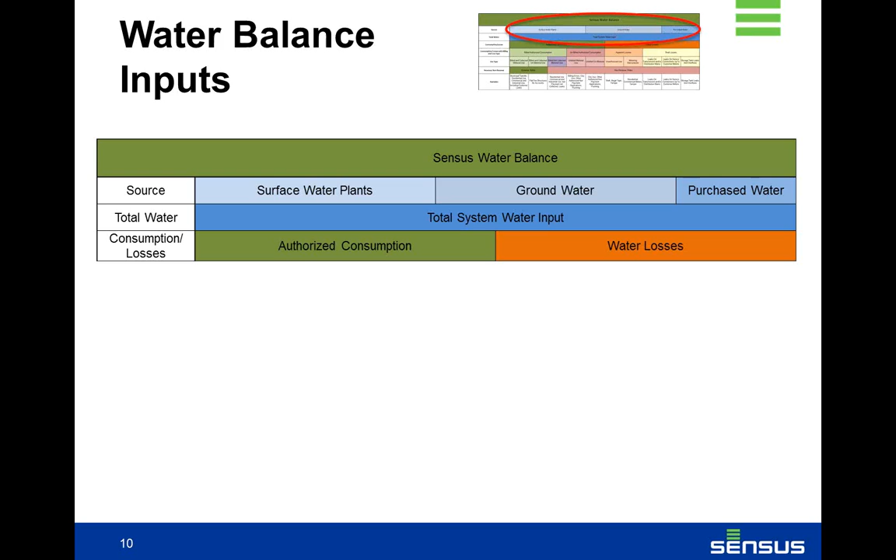The first being the water balance inputs. So we obtain water from surface water plants, groundwater, or even purchased water from other neighboring utilities. Those 3 components comprise the total system water input. From there, the water is either consumed in an authorized manner or considered a loss. And we'll further break down those pieces going forward.

Looking into the authorized consumption component of it, typically those pieces are two use types: billed and collected metered use, billed and collected unmetered use. So the first, as the most common usage, would be either we transferred it to another municipality and sold it there.

It was used in some sort of residential, commercial, or industrial consumption. But importantly, any leaks associated with after the meter would be accounted for here as revenue water. We could also have billed and collected unmetered use where there's flat fee structures, making it difficult to totally account for the entire flow associated with that portion of revenue water.

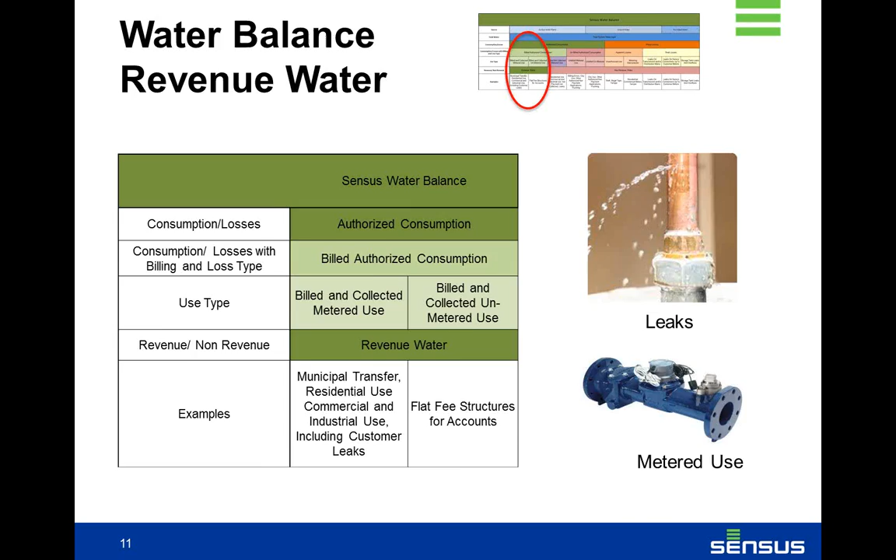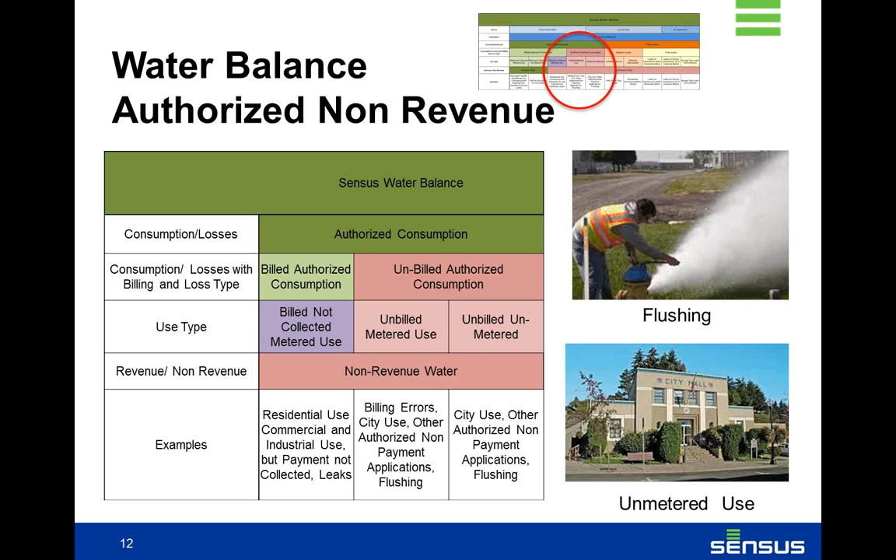Then there is also unbilled authorized consumption, breaking down into both unbilled metered use, an example being a billing error, city use, or other authorized non-payments, which could be flushing within a utility. And then unbilled and unmetered use - again city usage might be unmetered, flushing might be unmetered as well.

So all of those components comprise the unbilled authorized consumption portion of the water balance. Moving forward to the loss piece, we break down the losses into several different groups. Unauthorized use, such as thefts, illegal taps, or tampering with the meters, comprise a portion of non-revenue water.

Second of apparent losses is metering inaccuracies, where we're not actually accounting for all of the water that is consumed and used for commercial, industrial, residential use. That could also be attributed to some sort of tampering associated with the meter or age of the meter - an opportunity for us to account for that water going forward.

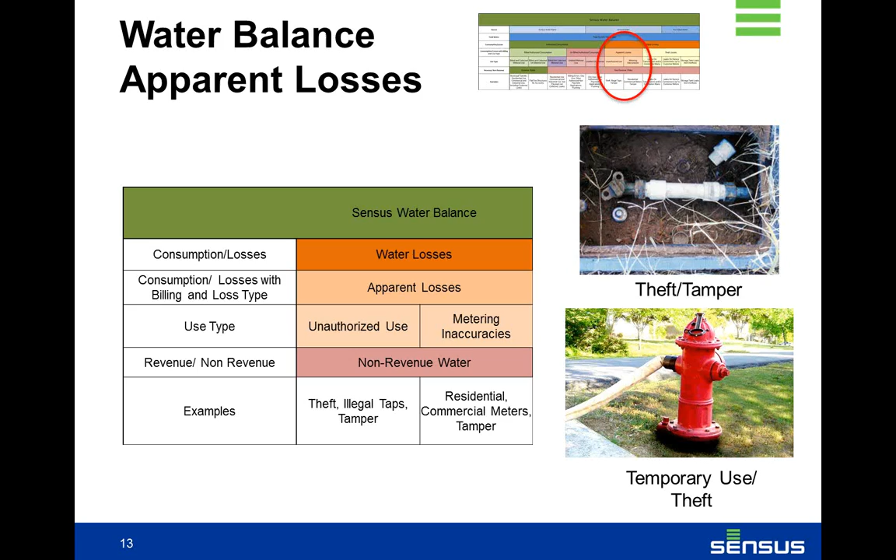And the last part of the water balance are the real losses. We look at those in terms of three distinct use types: leaks on transmission and distribution lines, leaks on service connections up to the customer meters, and then storage tank leaks and overflows. Those all comprise non-revenue water as well.

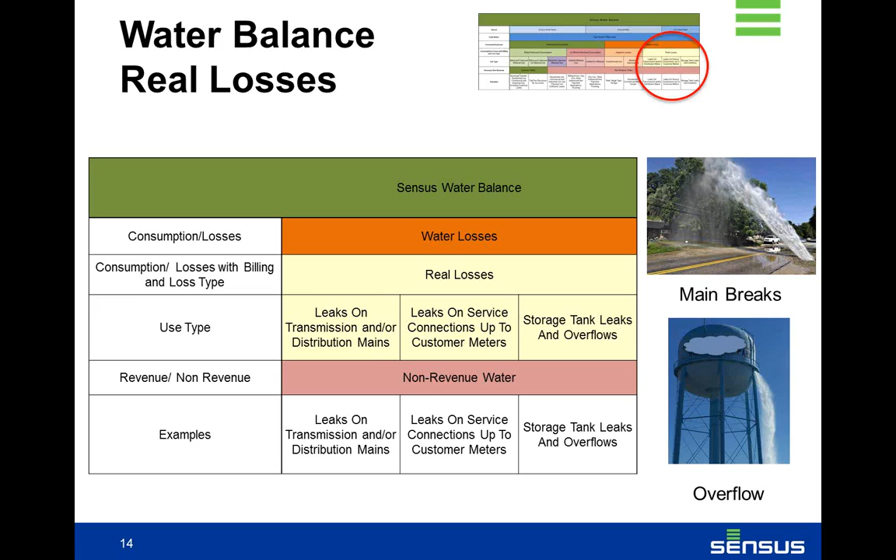Bringing that together gives us a complete picture of all of the water coming into the distribution system, less all of the water that was consumed, transferred, billed, used, or unaccounted for in some other methodology, to bring together the total water balance of each individual utility.

So if we look at how to monitor non-revenue water, many of you use different methodologies today. The most common one is to monitor produced versus sold, where we know all of the water put into the system and ideally all of the water that's sold, leaving us some portion of non-revenue water, but this doesn't really break it down into the same granular categories.

So can you break that down further into apparent losses versus real losses, trying to attribute to things such as theft, tamper, or meter inaccuracies? Thirdly, importantly, is how accurate is the information? Is the information conveyed to us reliable and dependable? Are there meter inaccuracies - things we need to account for or adjust to close that water balance appropriately.

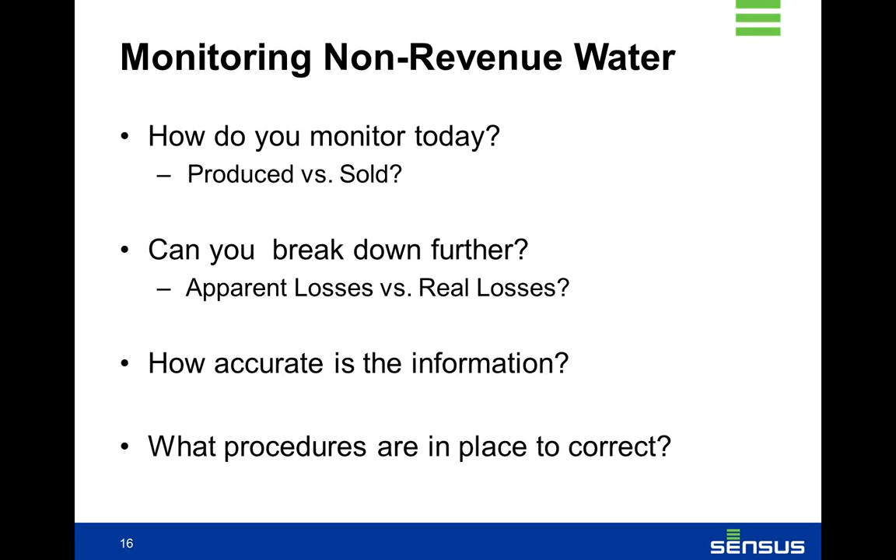And then lastly, what procedures are in place to correct or adjust all of the areas where we attribute either revenue or non-revenue water? If we go forward and continue to look at these things, we look at two specific cycles associated with non-revenue water.

Starting with item number one: as non-revenue water increases, the costs of operation increase. These costs further rise and increase capital expense to meet the demand of additional supply within a distribution system. That goes to item four, where budgets are decreased, restricting corrective actions to reduce non-revenue water. This forms a vicious cycle, further constraining our ability to recover from all of the non-revenue water activities within a utility.

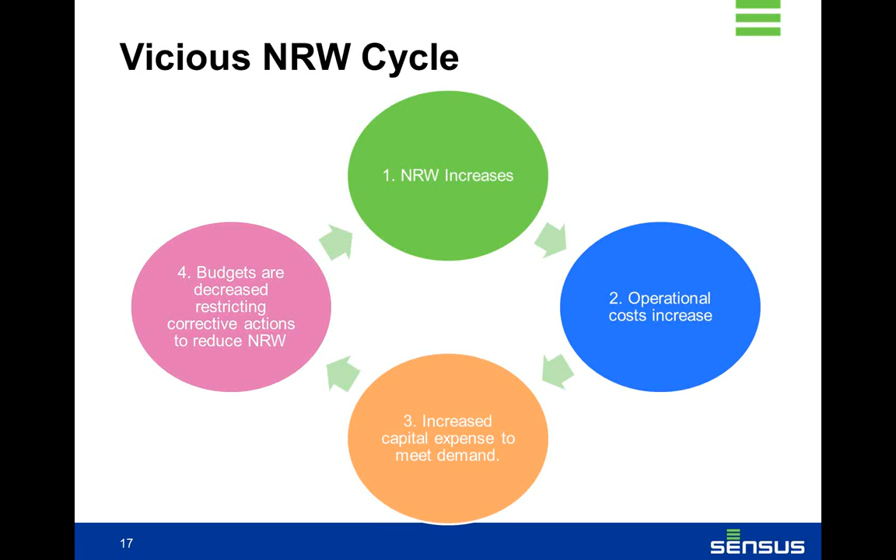The opportunity for us to change from a vicious cycle into a virtuous cycle starts with non-revenue water decreasing, which then increases our revenues and decreases operational costs, providing deferment of capital spending for supply increases. That creates funding available to invest in additional non-revenue water recovery. As we break that vicious cycle, we capture additional funds to improve the utility's operation and find new methodologies and funding available to find more of the non-revenue portion.

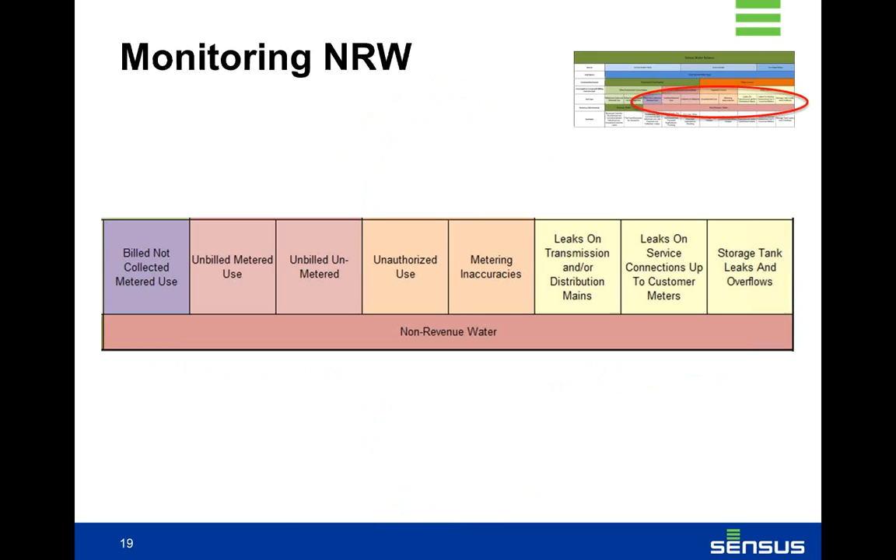So as we begin to look at monitoring all of the non-revenue water, I want to focus a little bit on different types as we look at each specific category.

The first is billed not collected metered use, something faced in all utilities where we have to write off the amount of money we spend to produce water, send it to a consumer, send the bill, and then not collect the payment. For some utilities this can be a significant factor, anywhere from 5 to 10% of actual utility payments, and frequently numbering over $100,000 a year.

Often the utilities would have to bear the cost of expensive truck rolls and then the labor associated with those truck rolls. Could we use that labor to find higher value leaks or repair the leaks, thus helping us break that vicious cycle of non-revenue water?

As further technology becomes apparent and available to all utilities, remote shutoff valves alleviate and provide an opportunity for utilities to capture and mitigate non-collected payments faster, saving more time and money for those utilities.

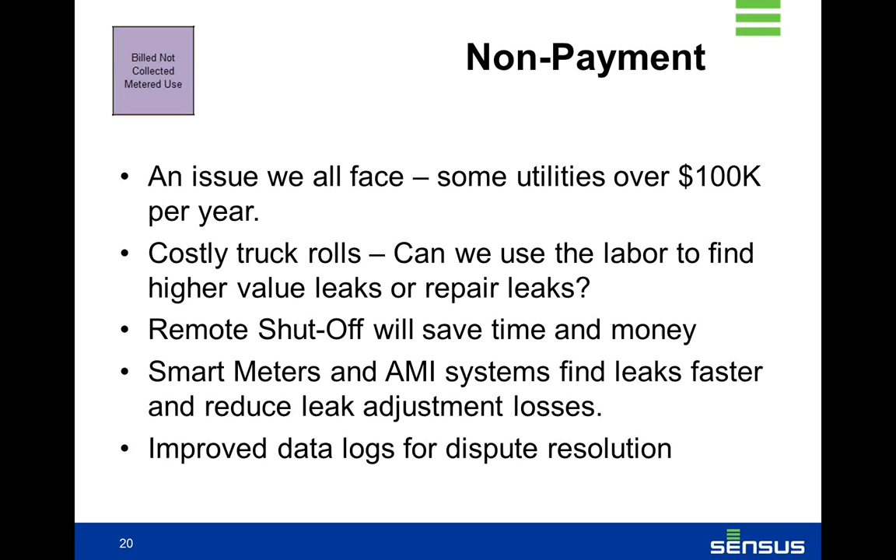Smart meters and AMI systems that report on an hourly basis can certainly find leaks and reduce leak adjustments going forward, which often contribute to a high volume of non-collected or write-offs associated with billing activities. With the new smart meters, most include improved data logs for dispute resolution, further enhancing collections and disputes associated with leaks or non-payment activities.

If we look at authorized non-revenue water, where it's unbilled metered use or unbilled and unmetered, things like city buildings, flushing, city parks, the easiest thing to do is capture that consumption using meters so it is accounted for in the balance, even if it is not billed. That way it helps us understand exactly where all that consumption is, and could also help us find additional usage or conservation methods associated with those portions of consumption.

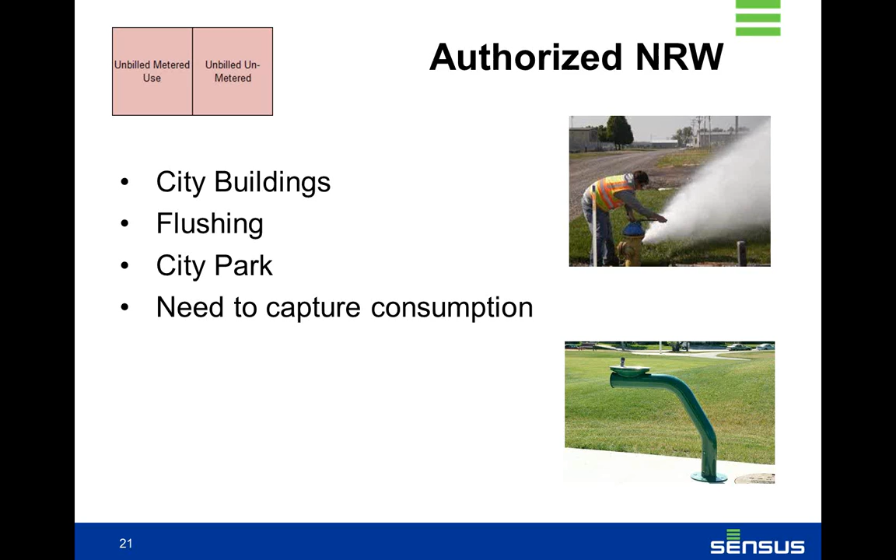Moving on to theft, an unpopular topic for all utilities, but certainly something that occurs in many municipalities. Smart meters and smart devices can detect tamper, empty pipes, or reverse flows associated with theft activities. An AMI system will help all utilities monitor those activities faster, getting hourly or daily reads associated with any of the activities within the service connections.

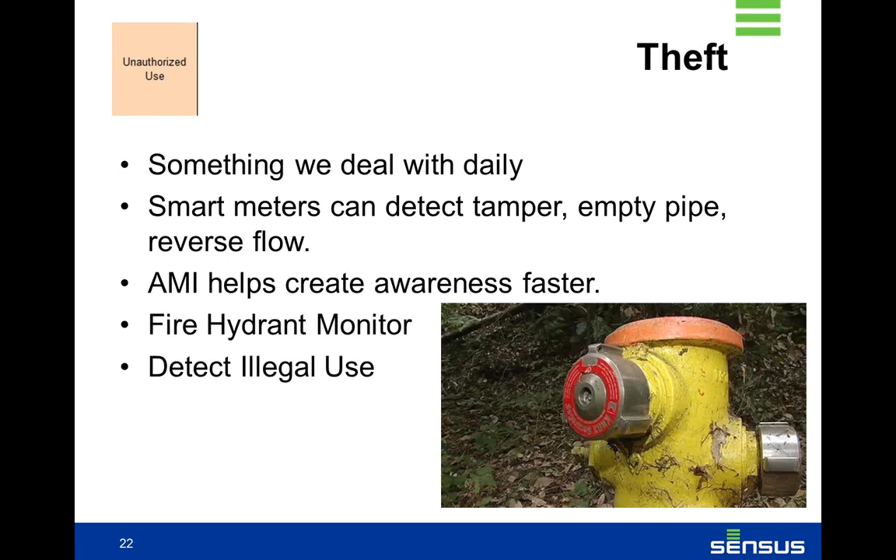Additionally, many AMI providers are coming out with fire hydrant monitors to monitor consumption and use inside those units. If there was any unauthorized distribution from there, it could be detected quickly. In an AMI system, you would get that notification possibly in time to take action and correct the activity.

In terms of meter inaccuracies, this is one of the easiest ways for a utility to capture a large portion of non-revenue. As mechanical meters get older, there is frequently a drift in accuracy that can be a substantial loss. Some of those meters have 10% or greater inaccuracy due to wear and age. The opportunity for utilities to invest in both solid state and long-lasting meters to provide extensive accuracy with the flow usually has a very attractive return on investment.

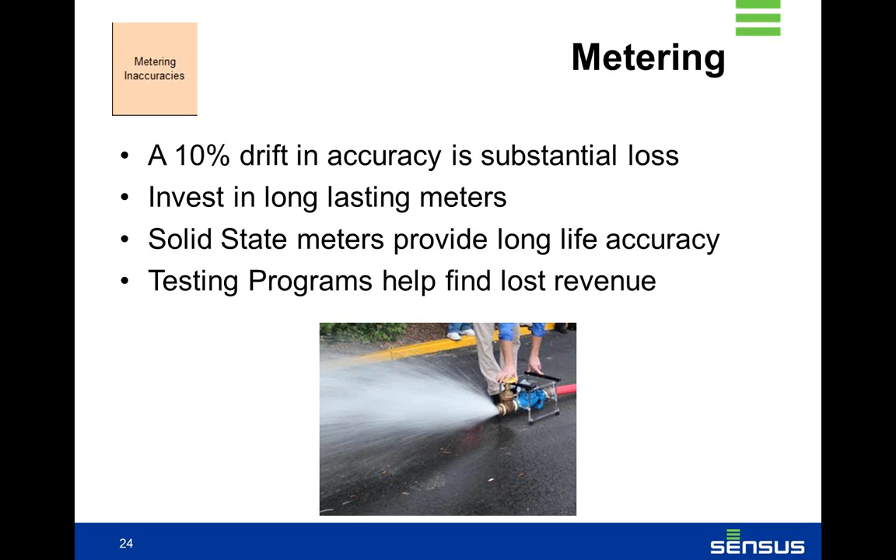We do encourage anyone to start testing programs, particularly around the large meters, as they tend to represent a significant portion of distribution consumption, and they're easy to test. They typically require field testing versus replacement, unlike residential meters, which is simply distribution of more units to the field. But a testing program can find a significant amount of actual flow that was consumption, raising your revenue and reducing the non-revenue water component associated with the water balance.

If we look at real losses, the leaks, obviously something we want to improve and avoid in all utilities. Typically, the easiest way to find leaks is to attribute more data throughout your entire distribution system, whether that's smart meters, pressure monitors, or additional devices that pick up sensors on tanks and overflow consumption within the distribution system. Additionally, acoustical monitoring can be deployed on many AMI systems to detect where the leak might be.

This gives you the opportunity to look at all four stages of the leak: awareness - do I have the leak and how big is it; locating the leak with the use of pressure or smart meters or acoustical monitoring; then deciding to take action; and most importantly, verifying the leak quotient has been changed and we have a true improvement in the system and reduction of those real losses.

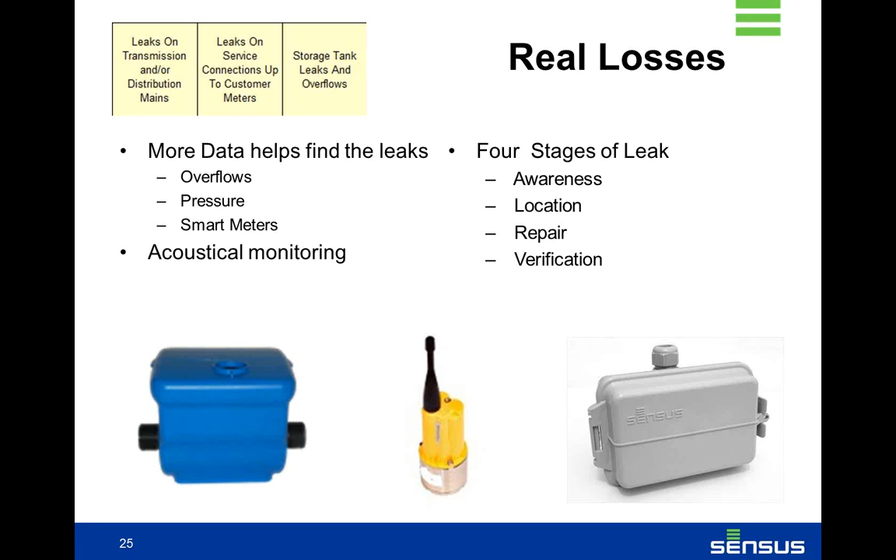This can be used for many types of leaks, whether they're in the distribution mains or in the service connections, or whether they're just tank overflow leaks as well.

On top of many of these things, you can use analytics to track the data, and we encourage you to utilize that on an hourly basis, because the diurnal use pattern within a utility system does vary by time of day. Monitoring things such as pressure and acoustical levels over that entire use pattern gives you a lot more intelligence to find the leaks.

You see there examples of leaks detected through an AMI system, either meter or actual acoustic monitoring. I think Avery will share more about that, based on his experience, going forward in the rest of the presentation.

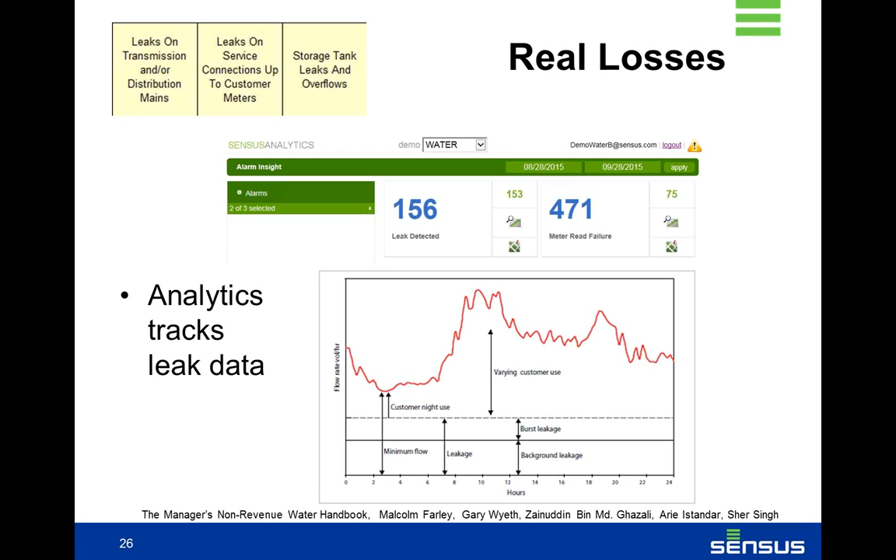Additionally, in looking at the real losses, you can attribute specific hourly consumption data, whether that is patterned use or continual leak data associated with real losses, to understand if it's consumption or leaks associated with distribution of the water.

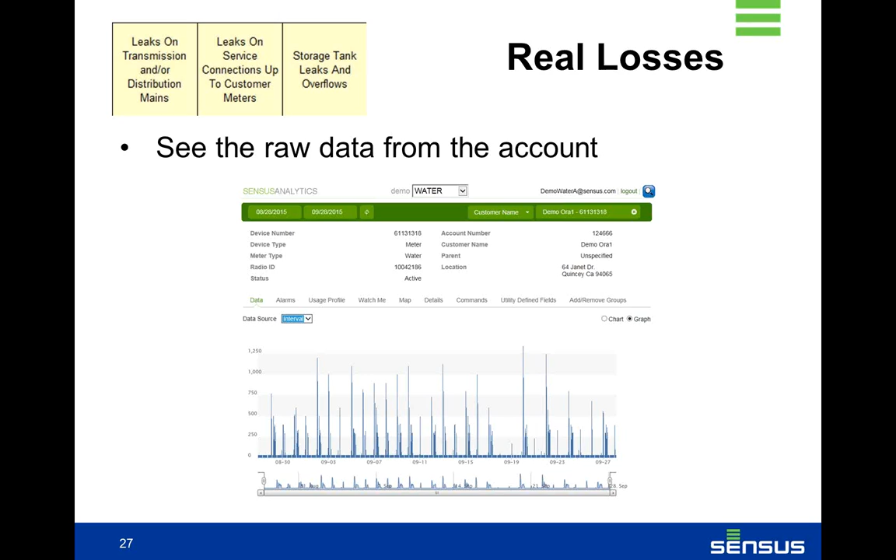Another way to help find and identify real losses is to deploy a district metering area program, where you break down your service area into smaller, easily tracked zones, so you can focus on older parts or areas that you suspect or know have a higher leakage rate within your distribution system.

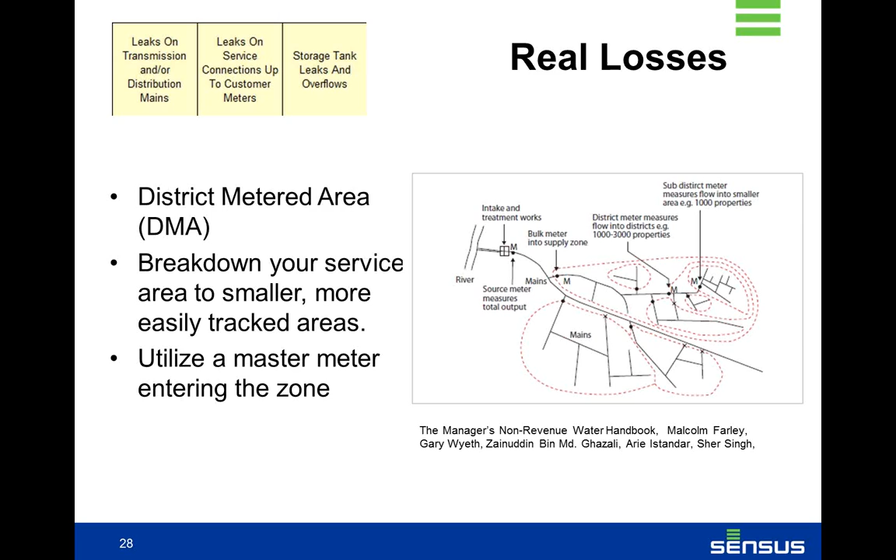Utilizing a master meter or virtual meter inside of those zones to account for the water may allow you to progressively find the leaks and then stage that out over time to grow, instead of trying to take down the entire process in one calendar year. So the use of district meters does help us find and break down that system.

Additionally, the use of pressure associated with the entire distribution system, where you could look at a pressure profile of what the actions are with respect to flow as that pressure changes, as flow consumed or the amount of water consumption rises or lowers, would be a great way to identify a leak within the distribution system.

If the flow is actually reduced and the pressure does not increase, typically that is an indicator of a leak, and you can use this to both identify the leaks and reduce and control the pressure within the system, as pressure is significantly one of the components of a distribution system that helps cause leaks, and is the easiest way to reduce the leaks if we're able to reduce the pressure within the system to minimize leaks in the lower usage times of a water distribution system.

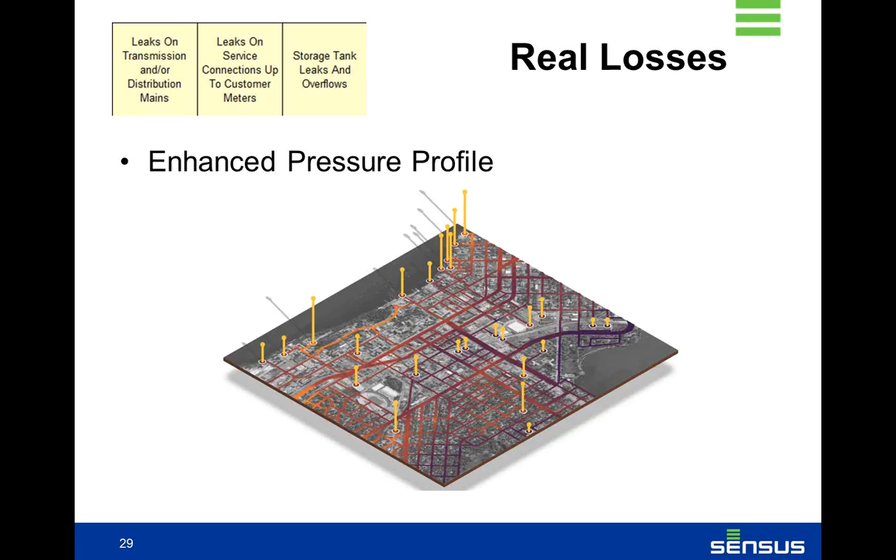You'll see that here on the next chart. By simply reducing the pressure, you can reduce the amount of leakage through a known hole in a significant pattern going forward. So there's some opportunities within a distribution system, just by reducing the pressure, to reduce the amount of loss within that distribution system.

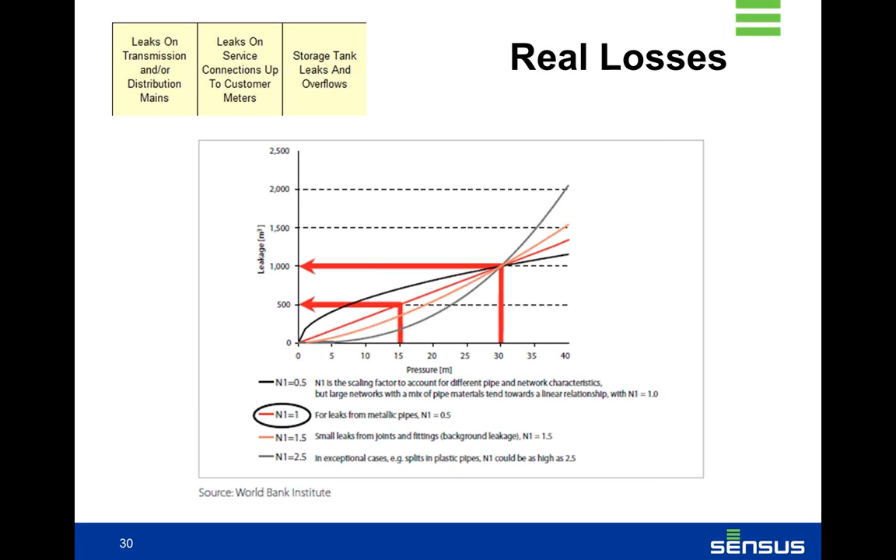So if we try to summarize all of those things, the easiest three ways to capture more revenue - and you can grow into this over time, but as you start to break that vicious cycle and enter into a virtuous cycle - by doing three simple steps such as ensuring your meter accuracy, creating some sort of testing program to make sure that you're accounting for all of the consumption that is delivered, is an easy way to identify and capture the most amount of your water balance that is already available and is not necessarily a real loss.

But to help find more of the real losses, capturing more data to account for all of the areas of the water balance, breaking down each of the components we shared today, helps identify which pieces are being used and which are being accounted for. And that does go consistently with both measuring pressure and consumption and acoustical monitoring within the system.

So the more intelligence you can put into your distribution system and capture more data, the more likely you are to raise your awareness, your accuracy, and your location associated with those leaks. In order to do that, typically you need to analyze frequently the data available to you.

So the best way to identify a leak is to baseline the data, review over an hourly basis the consumption pattern associated with your utility, and utilize programs available such as the AWWA free water audit software, which is available to all water utilities to help close that balance. The same information we provided today is analogous to that software that is available for everyone's use going forward.

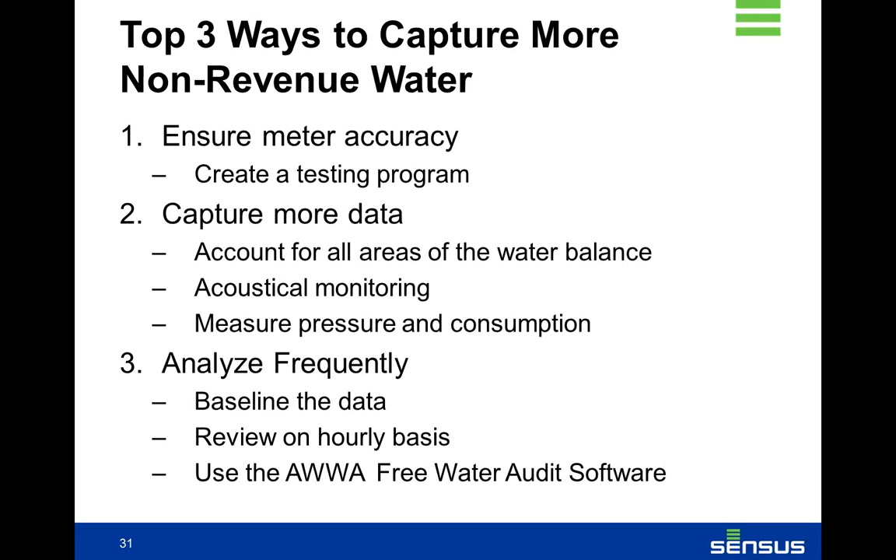So if we look at that, we encourage each of you to follow through your own water balance, the Sensus water balance, or the AWWA water balance, to identify each of the components within your utility, whether they are authorized consumption or non-revenue water pieces, to begin to count that and start the virtuous cycle of improvement within your distribution system.

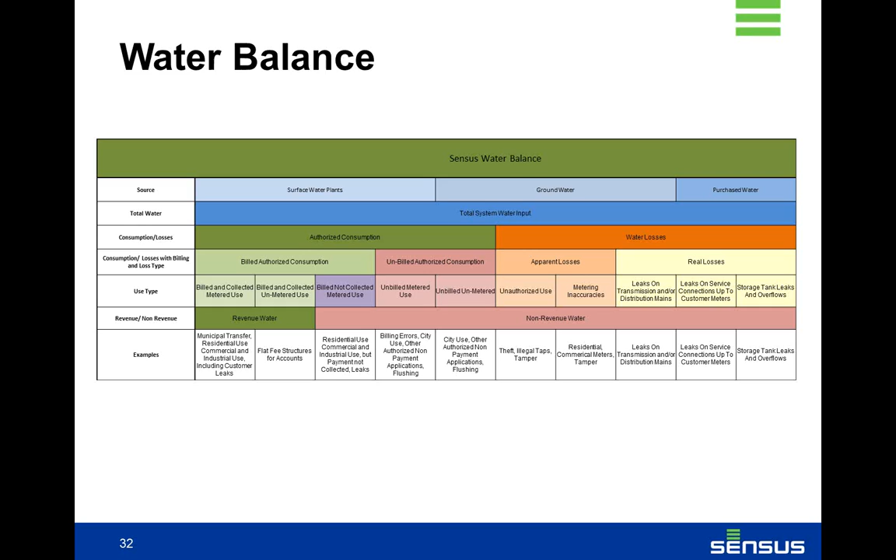And I want to leave everyone here with a reminder of why we're all here, and that's to leave clean water available for the future, whether that's energy consumption or distribution for fire safety or clean water for public safety and health for all of the citizens to come - that is our primary purpose. With that, that's all I had today.

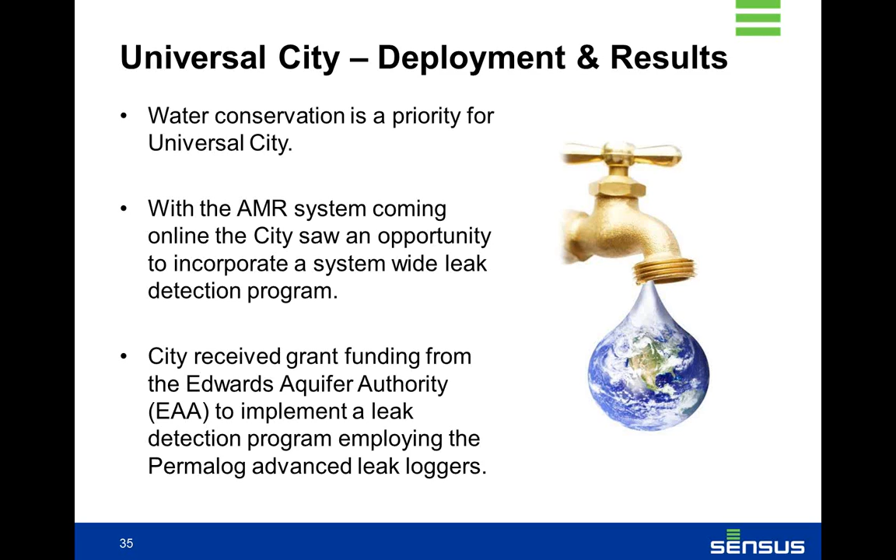With the Sensus FlexNet Advanced Metering Infrastructure, or AMI system, becoming operational, the city realized an opportunity to implement a leak detection program that could cover the entire distribution system using leak noise or acoustic noise loggers. It was hoped that with this technology, it would be possible to audit the water system on a daily basis and address leaks before they would normally manifest otherwise. With the AMI system already in place, the water utilities would have to come up with the funds to purchase the loggers and transmitters. So the city approached the Edwards Aquifer Authority in the hopes of obtaining funding for this project.

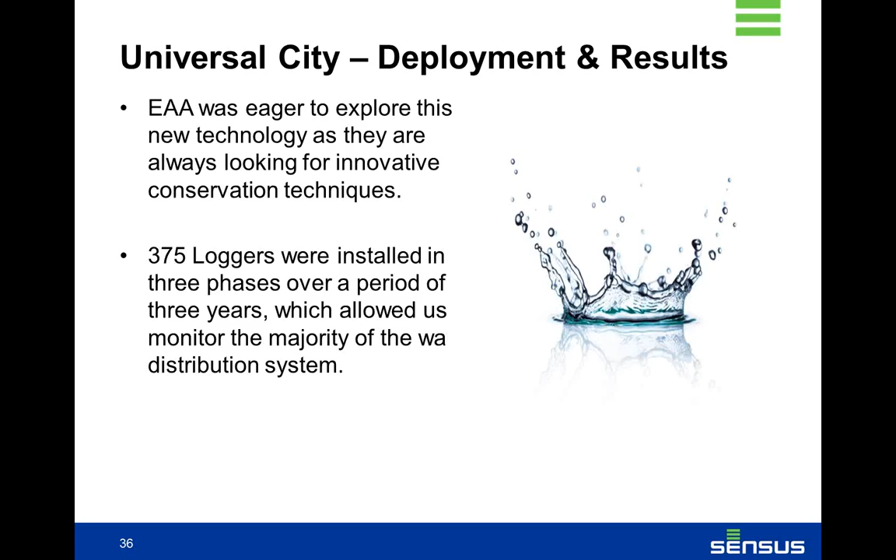The completion of the project made Universal City the first complete monitoring system, basically monitoring our distribution system to meter end user in the Edwards Aquifer region. At the same time we were installing the loggers, the city also replaced all water meters in the distribution system. At that time, the total was 5,784 meters, ranging in size from 5/8 inch to 10 inch. These included iPERL, SRII, and Sensus Omnis.

How the loggers work: the loggers themselves are placed on an inline valve operating nut connected to a Sensus FlexNet radio transceiver attached to the valve stack cap. The logger itself will turn on at 2 a.m. every morning and listen to the line. If the logger thinks it hears a leak, it will listen for it again a short time later in order to verify. After that, all loggers in the morning will report through the Sensus FlexNet AMI system. If a possible leak is detected, it will transmit this information, and then we would assign a utility crew to the location in order to determine if in fact there's a leak and make the necessary repairs.

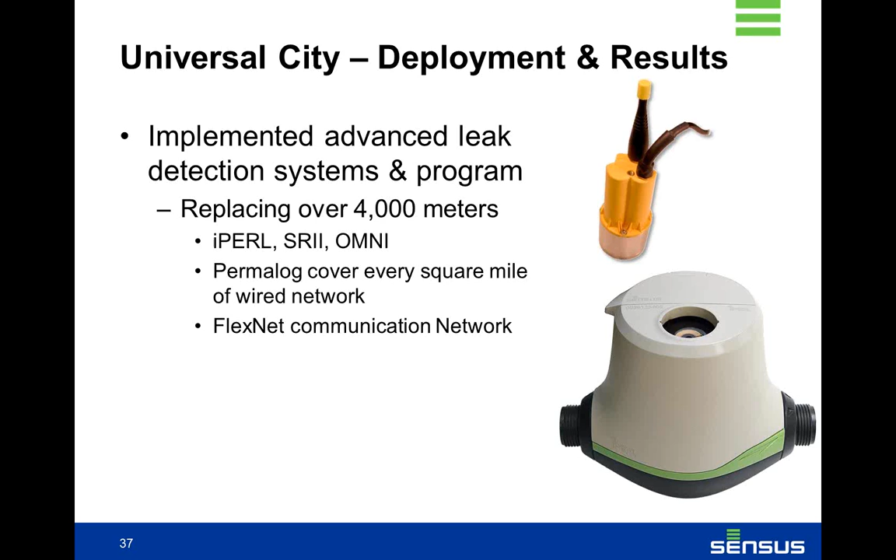The city had immediate success in locating leaks, some that had troubled us for years, and some that would have gone on for a very long time before being discovered. One of the most significant ones was in a location called the North Lake Business Park. There was a storm drain at the end of North Lake, which always had water coming out of it. At first, we thought it was infiltration from a natural spring in the area. However, the flow was constant, even in times of no rainfall and lowered water tables. The city tried for years to locate the sources of the water. At one time, we even called in the San Antonio Water System leak detection team, which proved fruitless for us.

When the first phase of our logger program was brought online, this area is one of the first locations to be monitored. Within the first couple of days of monitoring the area, we received feedback from the loggers that a leak was detected at a dead-end main. The culprit turned out to be a section of main that was thought to be abandoned.

The leaking section of main intersected the underground storm drain, but instead of showing up at the place of the leak, it was traveling upstream, or uphill, and infiltrating at a pipe joint about 100 feet away. This explains why we had no luck before actually finding it - we were looking in the wrong place. When we were able to locate that one, that was a big deal, because it had troubled us for years, and we bled a lot of water out of that leak.

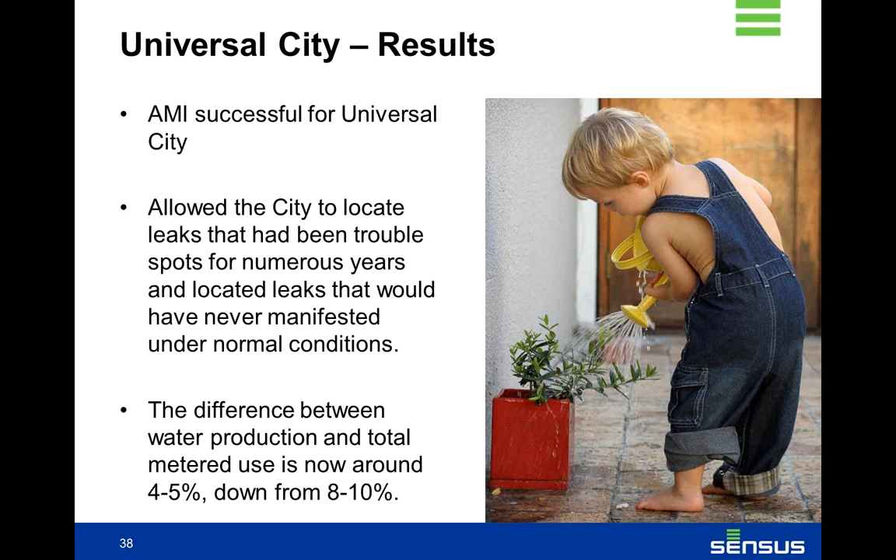Since we switched to the AMI system, which included replacing all water meters throughout the system, we've seen a substantial drop in non-revenue water. We've gone from an 8 to 10% down to approximately 4 to 5% difference between total water production and total metered use. We attribute a lot of this to the Sensus AMI system - we're getting a far more accurate accounting of water delivered to our customers, and we're able to address leaks in the system before they manifest on the surface.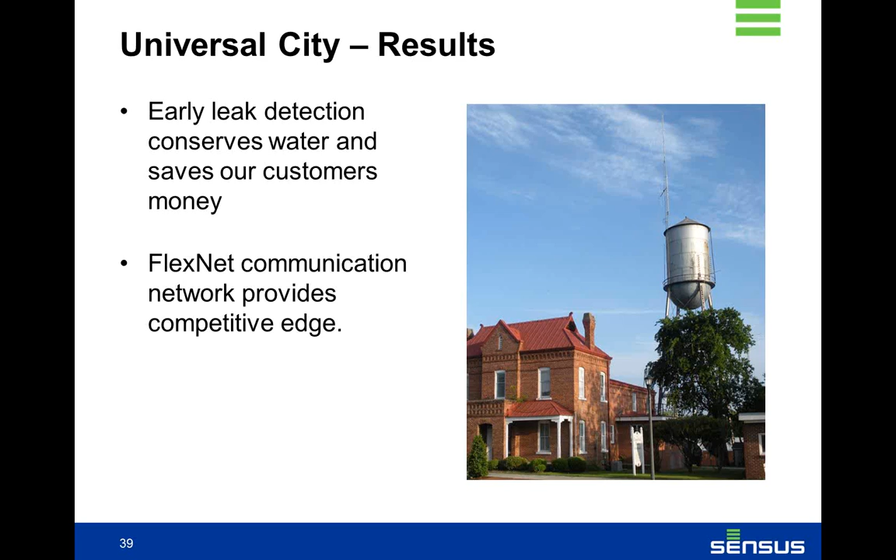And that covers my end of the presentation. I think I've covered it pretty well. Thank you for your time, and I'll turn it back over to Travis.

Thank you, Travis and Avery, for a great presentation on reducing non-revenue water. This is a common issue for utilities, and I'm sure the audience appreciated the leak detection strategies and available solutions to manage non-revenue water that were provided in order to ensure the health of the system is maintained.

Now we're going to start the Q&A. We had quite a few questions that came in, so let's begin. I first wanted to address a question from a couple people where they were wondering, what does AMI stand for? And that means Advanced Metering Infrastructure.

The first question is from Urema, from Toronto, and she is asking, Travis, isn't it easier to prevent real losses from storage leaks by maintaining the equipment? I think it should be cheaper than solving the problem after it occurs, and it also reduces the loss of fresh water.

That's an excellent question. So I certainly would agree that a great methodology is to enlist a service plan associated with your storage tanks that includes all the maintenance associated with it.

The opportunity is to put some sort of monitoring device on those tanks that will let you know when those systems have potentially failed, or someone has done something unintentional and caused a leak or an overflow, to give you feedback so that you're able to take action quickly and capture that information instead of relying on a citizen to call in or alert to a problem that goes on for several hours during non-working portions of the day. We can certainly utilize both systems: a well-sited maintenance and asset improvement program as well as a monitoring program.